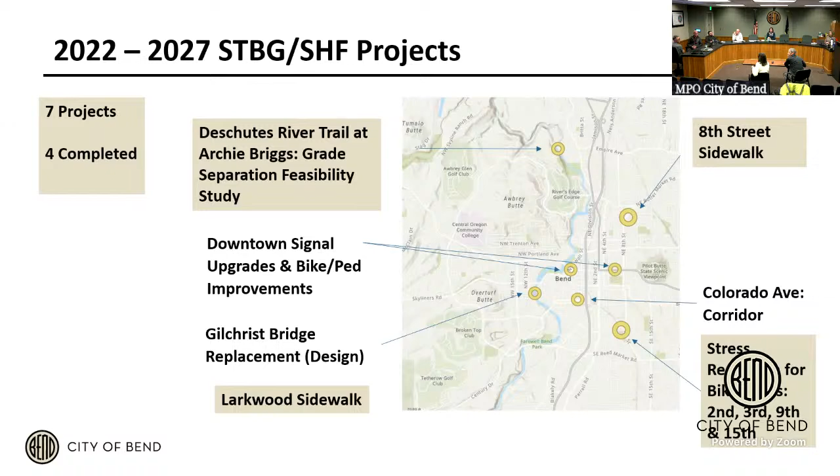This funding shows the benefit at the time - seems such conventional now, but it was a pilot project for removing and restriping with buffered bike lanes, and then using delineators. Next slide.

So this was the lion's share of the funding you saw across all the projects. It completed the program, and we've spent - total, yeah, about $500,000.

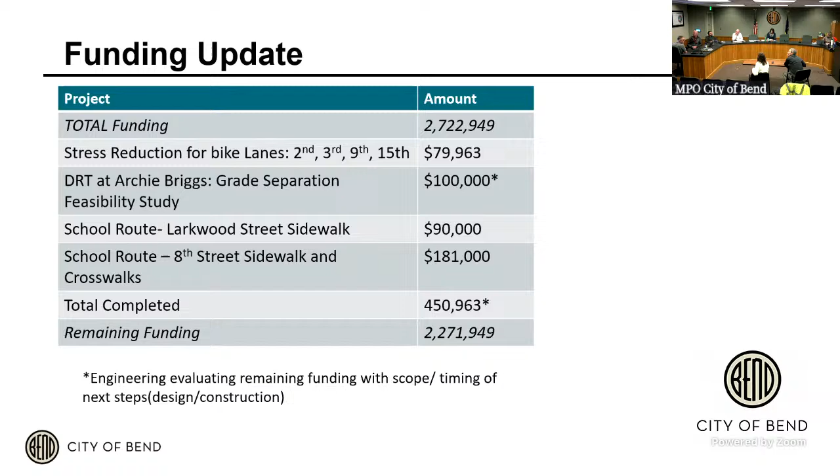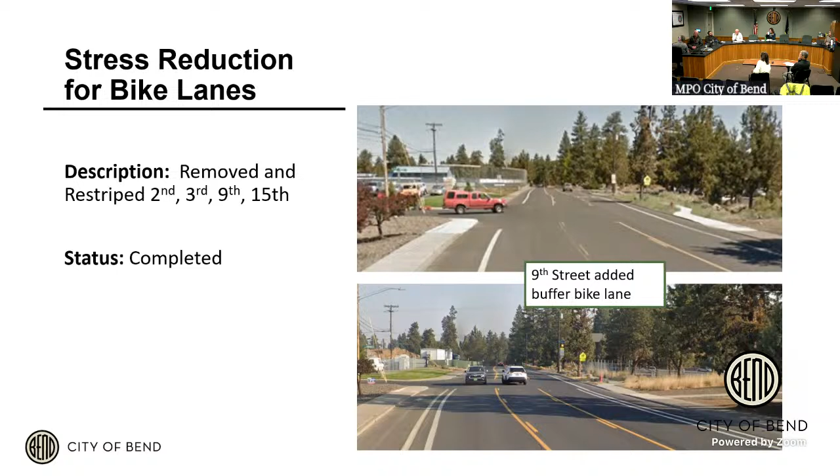Next slide - a couple before and after pictures which help tell the story of what we're trying to do and why. You can see on 9th Street, north of Wilson towards the high school, the single bike lane white stripe versus the buffer stripe and some narrow center turn lanes. Next slide, we'll just kind of shuffle through these.

On 3rd Street, just north of Wilson, there was no bike lane - it was a wider center turn lane. We had done the southern section when we repaved it a few years before, but there was no project and no upcoming paving project for this section. Through this funding we were able to remove and restripe to add the bike lane. You can see, almost like you couldn't script it better, a person riding on the sidewalk in the top picture - I didn't find her again that same day for the second picture. Next slide.

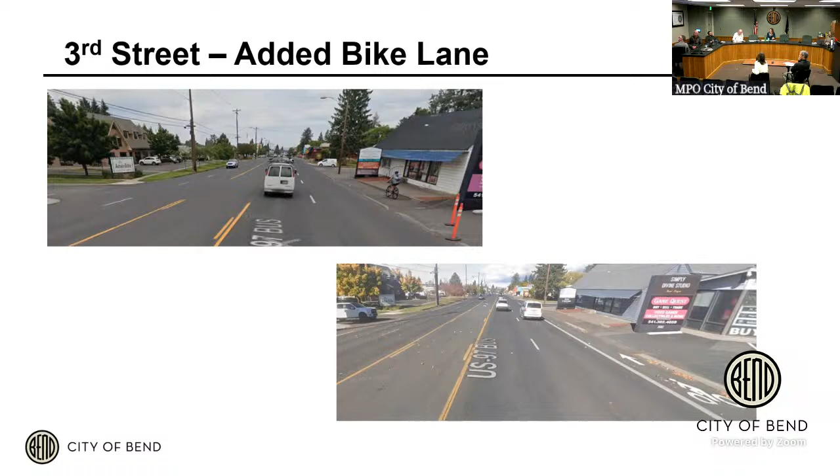Sorry, there's a lag, it's stuck.

On 2nd Street, here's where we removed a lot of lane width. You'll see this through town, and we're looking at a handful of other streets since this worked pretty well, once we could get a contractor here to do a whole bunch of work, because it's expensive to get them here.

We have a lot of 6-foot bike lanes, and we're able to narrow the travel lane from 12 to 11 feet and make it a 5-foot bike lane with a 2-foot buffer, which allowed us to put delineators in.

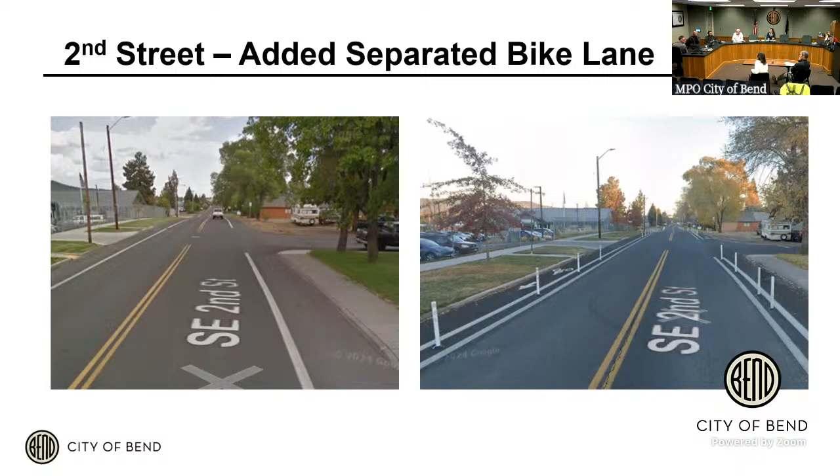That's what happened on 2nd Street. Next, on 15th Street we were able to add a buffer and repaved this. We also added two crossing islands as well.

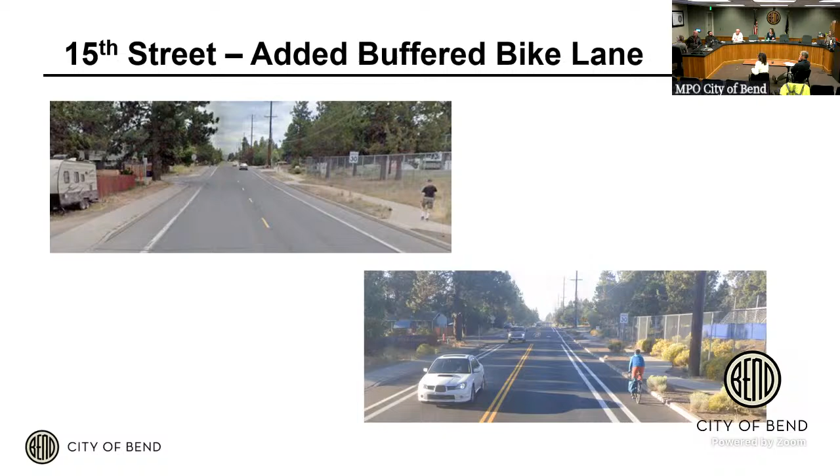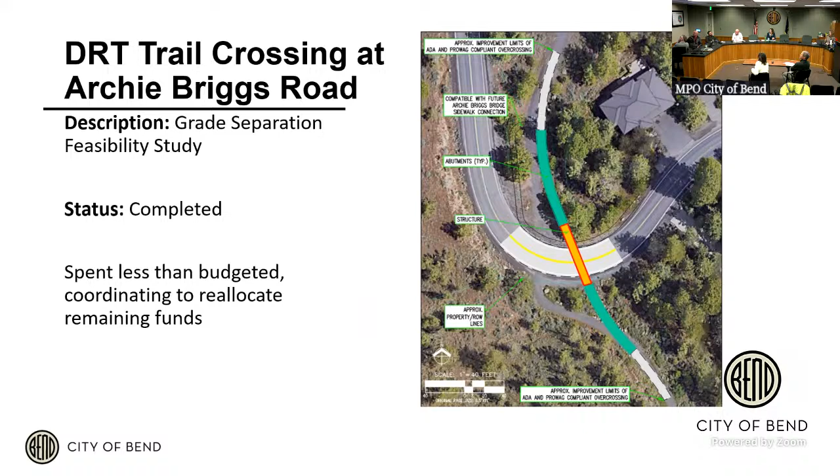This is the concept rendering for checking grades and feasibility for an accessible route across a future Archie Briggs Bridge, which will be spectacular. It'll be an elevated bridge. We're still confirming funding in the shorter term, but that is the intent.

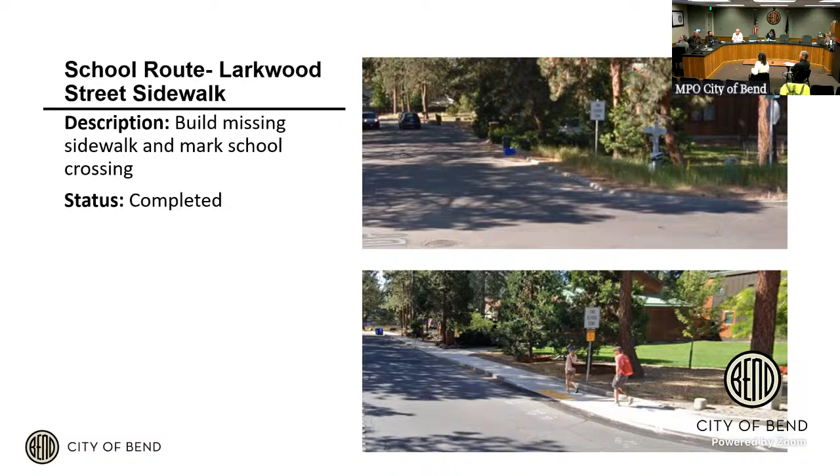This image was from Google, since we didn't get a picture before winter came. A car drove by when kids were walking, which tells you they're probably doing it quite a bit.

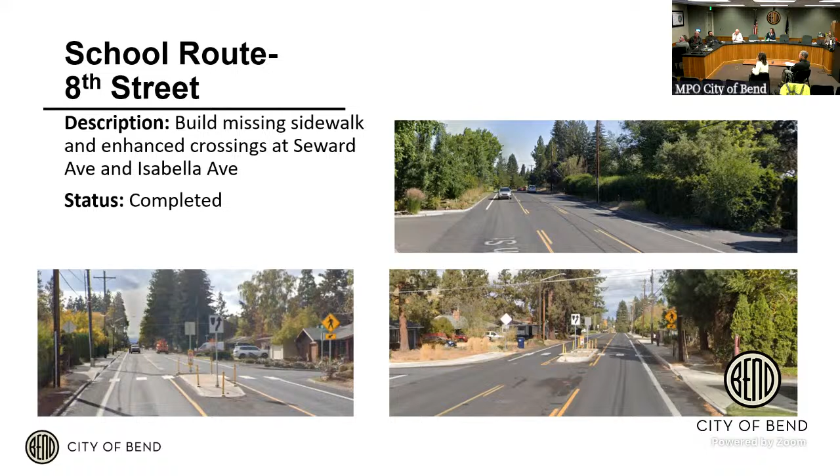Here's 8th Street, where we built pedestrian crossing islands. We don't have any other projects on 8th Street, so funding like this helps us change the context of those streets a little bit. We were able to build two islands and some sidewalk gap sections to connect people across to Hollinshead Park on the other side, as well as some transit.

So those are the ones we've completed. What's upcoming, partly because Colorado Avenue was delayed for a variety of reasons, and the other projects were just funded starting in July, in the later periods of the grant. One is the Deschutes River Trail at Riverfront.

That project just finished their 30% concept options in a public meeting, and they'll be moving forward into design to get a path on one side. If you're not familiar, it's the section north of the park and south between Drake Park and Miller's Landing.

We don't have the design yet. They just determined the selection was to put a path on one side with a one-way street, as opposed to a wider street and a path, since there are utility poles and everything else along there, so we're wedging things into existing space like we do in a lot of spots.

Question: out of the $345,000, how much have they spent so far? I don't know exactly, but probably not much—the concept work was just a small percentage, less than 30%.

Will that include removal and redoing of the existing sidewalk? Yes, it's completely destroyed in many sections. Some of the newer homes have redone the sidewalk in front of their property, and some of them haven't—so it's pretty crappy in spots.

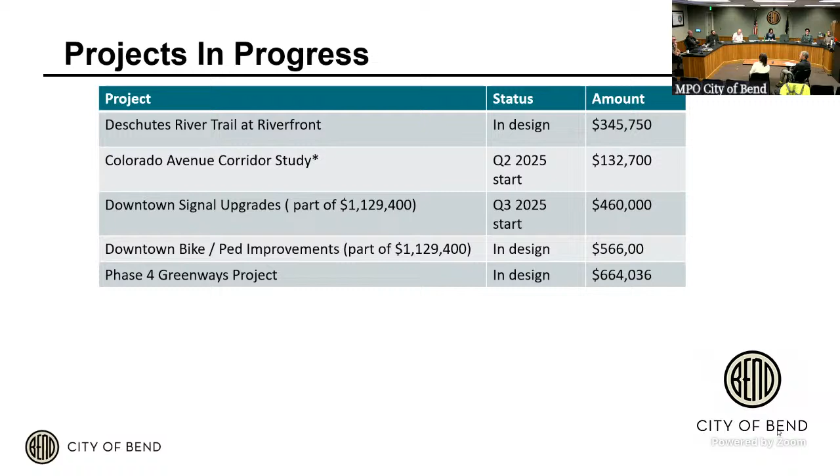It may be the case with some of the existing ones that were a little narrower. I don't believe any of them are less than 6 feet, and they will be between 6 feet and 8 feet, depending on the bike lane width. Okay, thank you. Yep.

Any more questions for Janet? No. Okay. Thank you all.

Yes, we do. So next, we have another project that was funded with MPO funds, and Paul Dean is here from Bend-La Pine Schools, and he'll be sharing his screen to talk about that.

And that is the Juniper Elementary accessible path, safe routes to school.

Not getting the permissions to share at this point. Since other participants are sharing, we might actually have to pull it up because it won't allow me to. You can just hit stop share. Try it now. Thank you, yeah, it's like a tiered level of allowing.

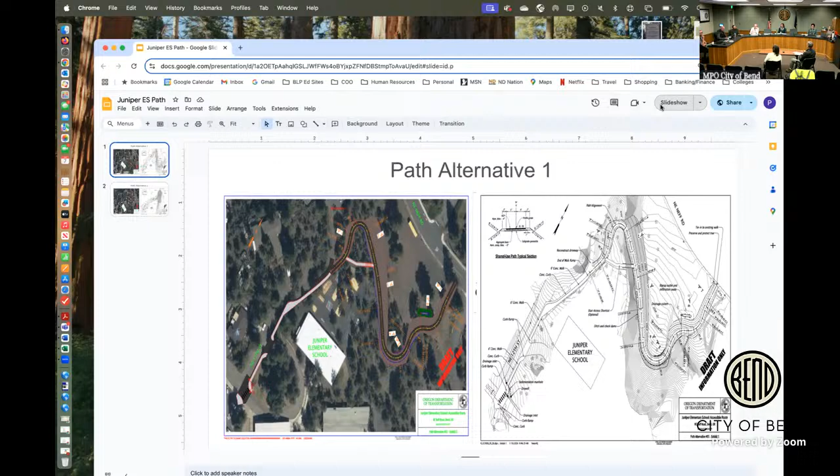Alright, can you hear me okay? All right, so this is a pathway that begins where Norton intersects 12th Street at the base of Pilot Butte,

and we call it the Juniper Path because it is right next to and through the property of Juniper Elementary School. About a year ago, in January of '24, ODOT did a plan - path alternative number 1. When they completed this and submitted it, we asked if we could meet with them out at the site and talk through it a little bit. A couple of the things we were thinking about when we asked to maybe consider an alternate path were...

that where this path exits on Neff - which connects Northeast 12th Street and Neff - it's closer to our bus loop, and there's also some utilities in that area. We also had an interest in maximizing some flat buildable space.

So in discussions with ODOT, they took this alternate plan number 1 and created path number 2. This gives us maximum additional buildable space in the flat area, should we need it in the future. The bus lane is right around where this word 'only' is, so by moving the path away from there, we don't want to create conflicts between our buses and students in that area. It does have a little bit of a steeper grade, so it might be a little bit more expensive to do this path as a result.

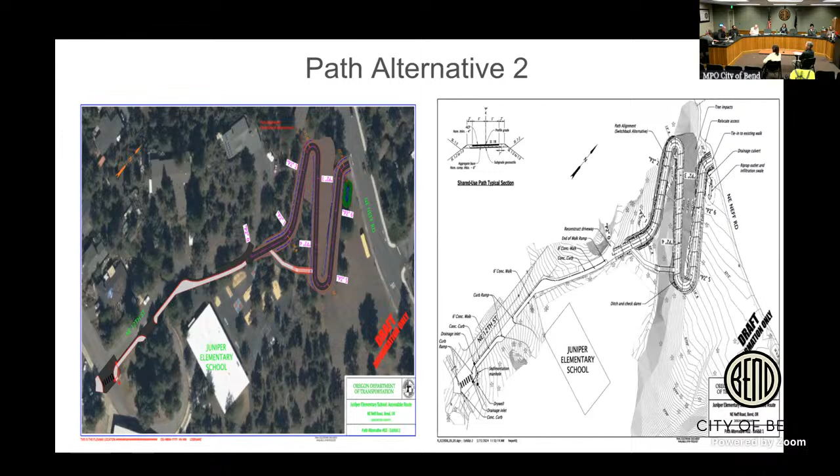And there was also some concern about the main street that kids use to walk to the school from the north side of Neff, and then how they'd have to get along Neff to either entrance of the path on either side. I'm not aware of those, but I think when we're looking at this project as a whole, we would need to take those into consideration and make sure it's not just the path through the property, but the continuation of the movement of students and people through those areas, to make sure there are adequate lines of sight and crossing that makes it safe for people.

So you might check with the city engineers on that, because there was a lot of input about that at that open house. Thank you.

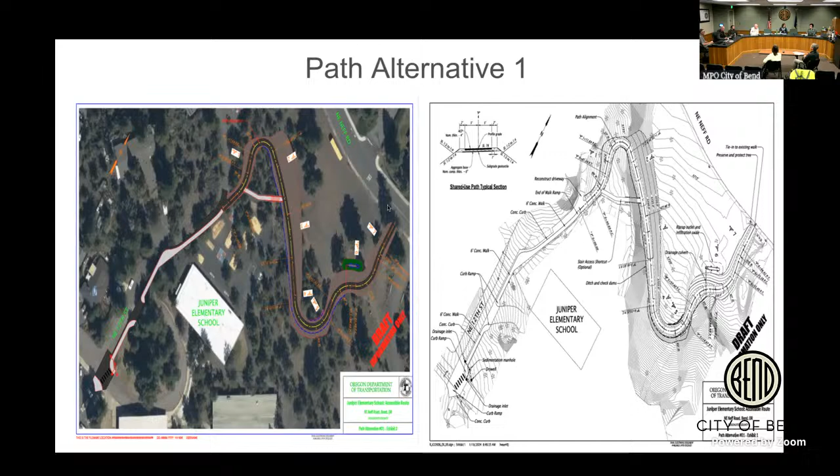I keep rattling that $1 million number in my head. What is the linear feet of that? It's gonna cost $1 million.

I just got out of a meeting and we were discussing that we feel that cost is a bit excessive and that there are ways to reduce it, maybe by 50 to 75%. I don't know much about that estimate, but that was something that was quoted to me about an hour before I came here.

I'll say there's a pickle that all our agencies are in together with the way ODOT and the federal funding is having to work. It's resulting in higher unit costs for everything, and additional contingencies in the methodology they have to use. We're seeing the same on other projects, so it's hard to say, but if ODOT had to deliver the project, that's probably what it would cost. If we can figure out a way to bring back state funded local program, the SFLP, or through STBG or other funding, and allow cities and agencies to use it, the cost gets reduced, because these programs aren't designed to do these small one-off projects. So, a little more info on this project that Paul was just talking about.

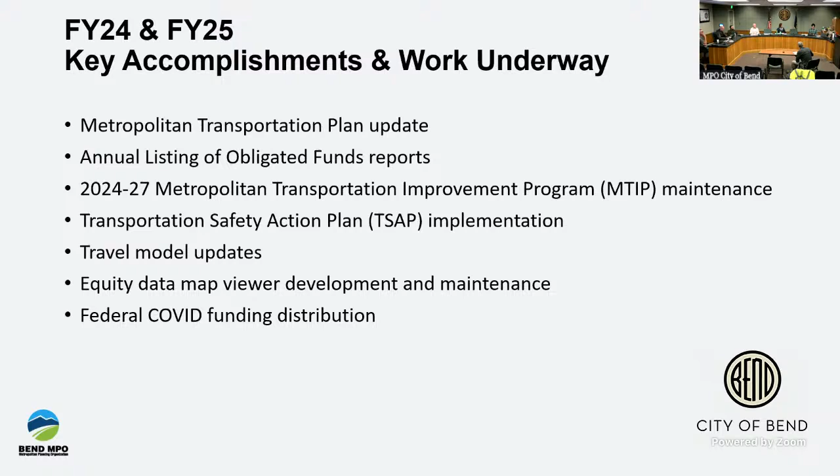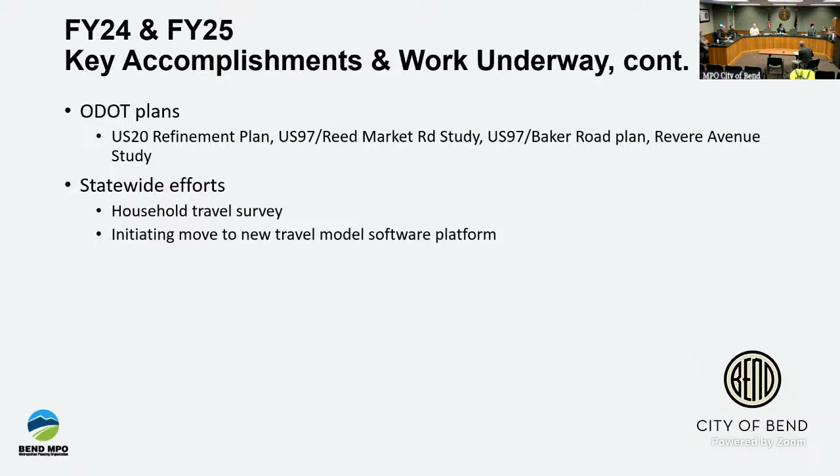Key accomplishments and work underway continued: any MPO assistance for ODOT planning efforts and for statewide efforts. A bigger one there is the household travel survey for Oregon, which is just wrapping up. The data should be available at the end of this month, and then work from there would be making the data usable to put into our travel model.

Looking ahead, a couple slides on our future year work program priorities. Probably the biggest one is the update of the Bend Area Transportation Safety Action Plan, or TSAP. Currently we have a scope of work outline, it's with city procurement, so we're hoping to have an RFP soon and start work on that project, certainly this fiscal year, but you'll all be kept in the know on that.

Another big one is what I had talked about, our SHF funding program—doing the project solicitation for 2028, 2029, and 2030 projects that you just heard about. And updating, there are some changes to Title VI or non-discrimination requirements for MPOs, so we'll be looking at doing an update to that plan. Any questions on this list of priorities for us in our work program? Okay.

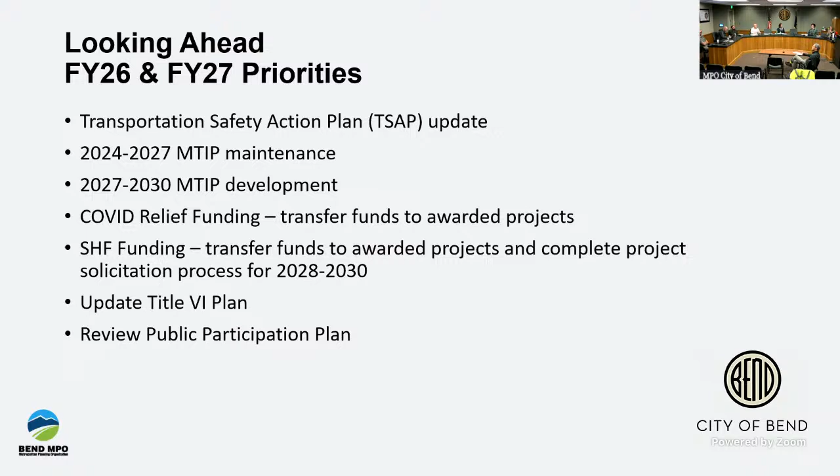Additionally, the household travel survey I mentioned, getting the data available to use in our travel model. Our strategic plan—we'd like to look out 5 years for MPO work items that we need to do, and are there any gaps in the federally required work that needs to be done, and what can we do to fill those gaps? Later we will bring that to the TAC and ask for any recommendations, and then bring that to our policy board. Yeah. Question.

Household travel survey, how's that gathering? How do they gather that information? So it was over this last year, surveys had gone out randomly across the state, and people opted to participate. This go around was mainly that you download an app to your phone and it tracked you, so a lot more accurate than in the past. The last household travel survey was done in 2011, and that was a booklet that you got.

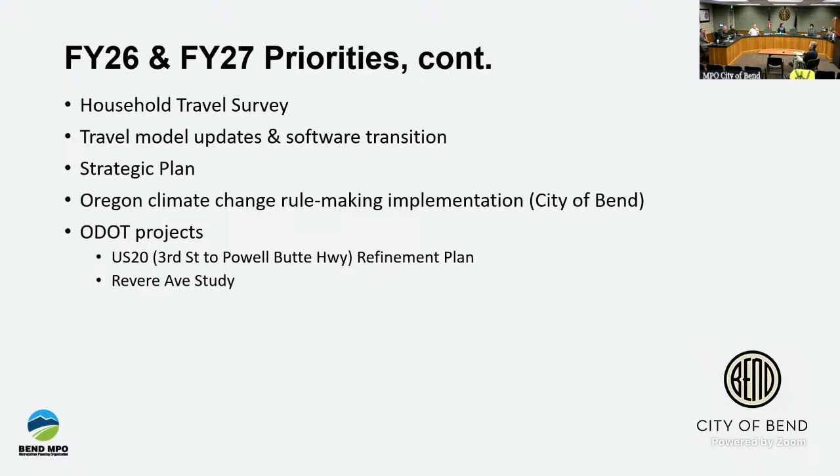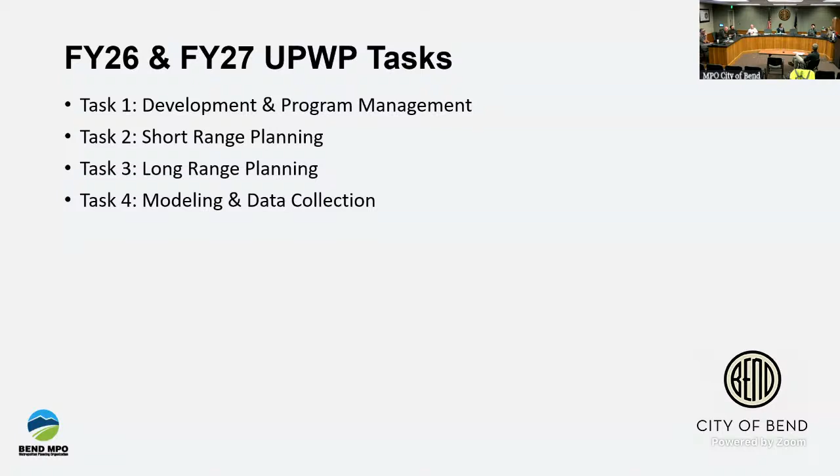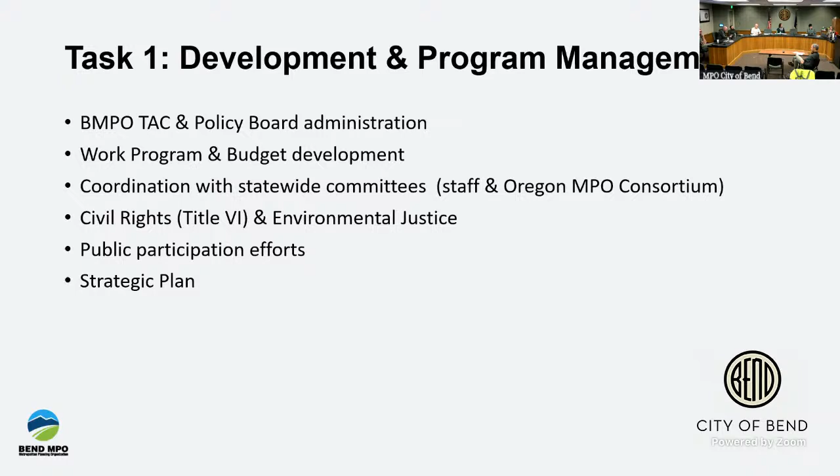In our work program, everything is laid out by tasks. Task 1 is really pretty administrative, project management. Task 2 is our short range planning work. Task 3 is long range planning, and task 4 is the modeling and data collection. I just listed a few things for each of those tasks to give you an idea of what that includes. Task 1 is our TAC and policy board administration, our work program and developing our budget, our Title VI environmental justice work that I had mentioned, public participation efforts, strategic plan.

Task 2 is our short range planning. Maintenance of our MTIP projects is continually being updated, funding is changing, or for projects within the Bend MPO area—ODOT projects, city projects, funding's changing, phasing's changing. So maintenance of that document. We also have to do an obligation report for past fiscal years, federal funding that had been obligated within the MPO area. And then our STBG, or State Highway Fund funding management. So it's mainly to do with funding.

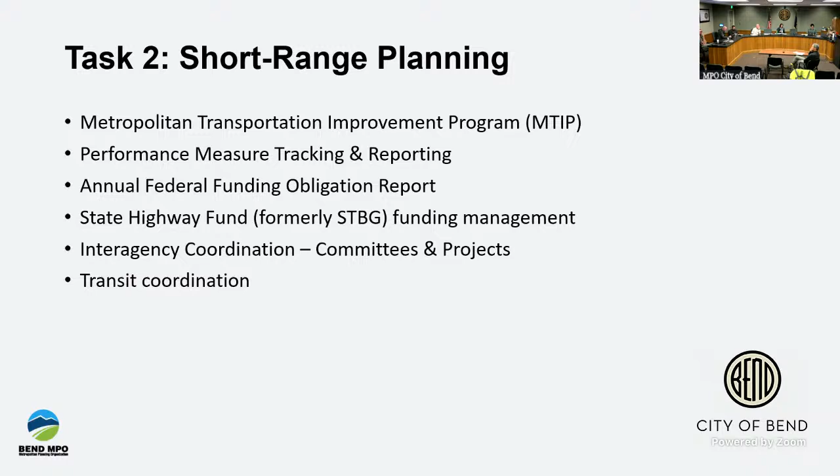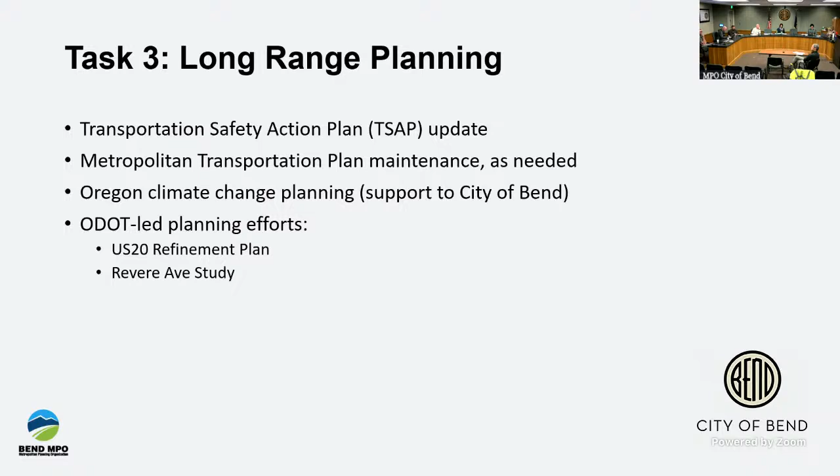Long range planning, of course, that's our Metropolitan Transportation Plan that we'd recently completed, so any amendments on that if we need to, and the big item, the TSAP, the Transportation Safety Action Plan update. And finally, task 4, this is all related to the modeling work, data collection, migrating to that new modeling software program, the activity-based model, and then data collection—our crash data with our Transportation Safety Action Plan, and equity-related data that we map on our website.

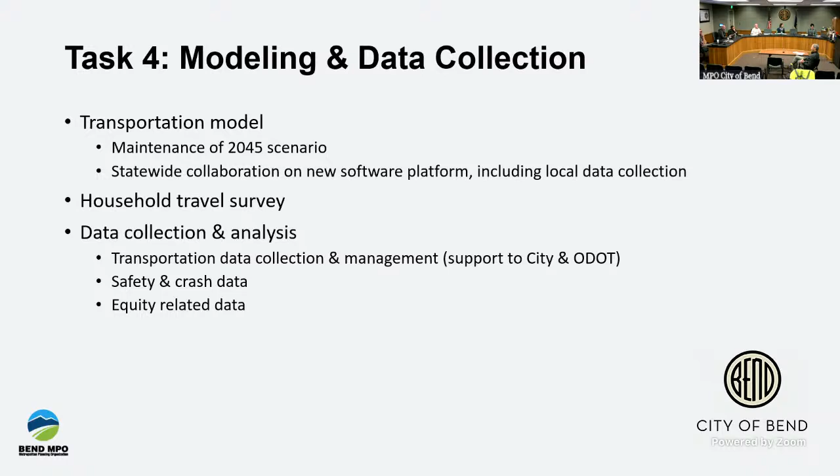So our work program schedule and adoption: we're going to be meeting with our state and federal partners next month to review the draft document. We should have that ready January 20th, be providing it to the TAC for your review, and then bringing this topic to the board at their next meeting. The budget committee—because within our work program is also our budget for the next fiscal year—we'll be having that meeting in March or early April. Then we'll have public review of the document, and finally, policy board public hearing and adoption in April.

Any questions on this topic? So now it's time for our member and guest roundtable. If anyone would like to share projects or things that your agency or entity is working on.

Eric Blunt here, Cascades East Transit, just providing an update on that COVID funded program, where we were awarded $300,000 for bus shelters, plus a little over $100,000 for other bus stop improvements. We're finally getting that project off the ground. If you're interested in following along, go to cascadeseasttransit.com/busstops. That's our project page describing this project and our broader effort to improve bus stop facilities in Bend and Central Oregon. There's also a feedback form where you can tell us what you think about what we're doing, request amenities in certain areas. The way we're approaching this is we're tackling known problem areas or known needs for improvement.